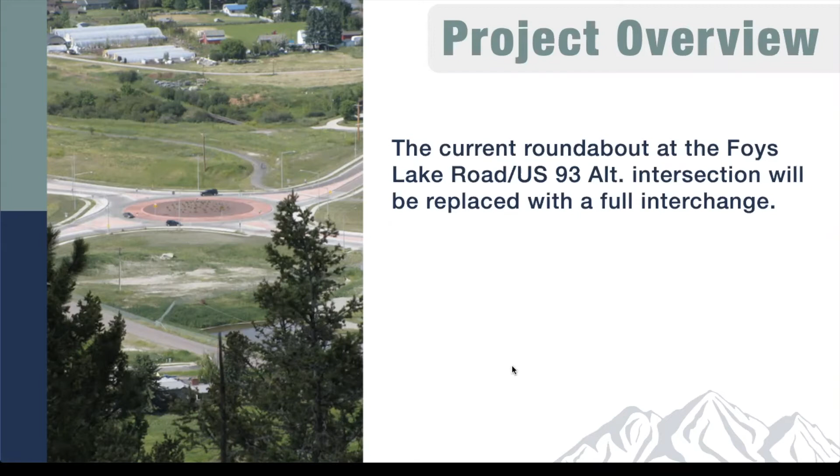Most of the signalized intersections you're probably familiar with that have 5 legs are pretty universally known as malfunction junction, regardless of the city they're in. Missoula has one, Helena has a couple. A 5-legged intersection really struggles to get the timing and signalization to work right without causing severe traffic congestion. So with that, I'm going to turn this presentation back to Beth so she can go into a little greater detail on the design review.

First off, when navigating roundabouts, drivers slow to between 15 and 20 miles an hour, and they're all required to travel in that same counterclockwise direction. This type of movement really reduces the likelihood and severity of an accident. Roundabouts are highly effective in reducing crashes at intersections, and that supports MDT's primary goal of providing safer roadways for this project area and across our whole state.

It's also important to remember that for the Foys Lake Road project specifically, roundabout intersections are really only a part of the interchange features and operations. We project that 20 years from now, in 2041, only about 50% of the current intersection traffic will be using the single lane roundabouts constructed on Foys Lake Road. So these roundabouts are seeing a lot less volume, and a well-functioning roundabout allows traffic to keep moving, which results in less delays and increased efficiencies compared to traditional signalized intersections at ramp terminals like this.

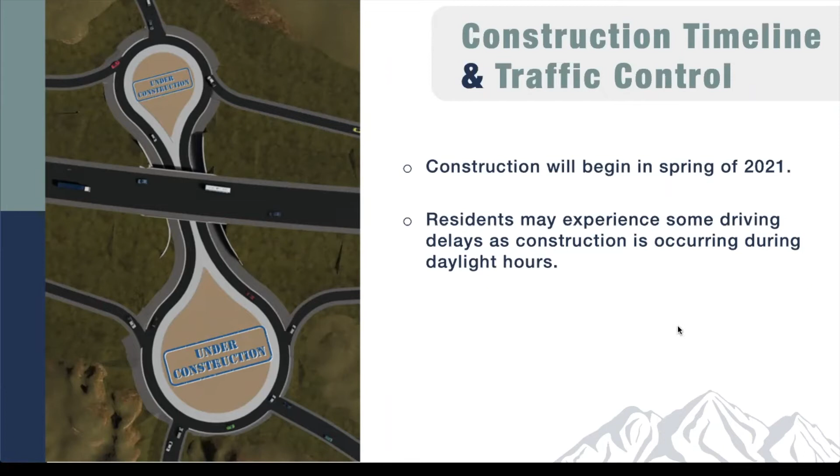One of the big things people are always concerned about is impacts — how's it going to impact me? Well, as with any construction project, we're going to have some delays and interruptions in traffic. We'll try to minimize those, but if everyone using this intersection as a commute plans on 15 extra minutes, you won't have any problems.

We're going to be real proactive in dust control. There will be a little more noise in the area from construction, but all our work will primarily be done during daylight hours. Any night activity will be scheduled well in advance, and notifications will be made.

Traffic will consist of single lane closures during work hours, mainly on Foys Lake Road. Our traffic control folks will use flagging operations and temporary signals if necessary to facilitate traffic. We may see occasional weekend closures — those will be scheduled, and notifications will come out well in advance. Those are mainly for operations that really require closure for safety reasons.

One thing we're thinking about now is setting the bridge beams, where we'll have two cranes out there with 120-foot long beams. We don't want traffic going under them, so we will have to do a closure. But we'll do that at low volume times — weekends, nights — so the road will always be open during peak traffic hours and during the weekdays.

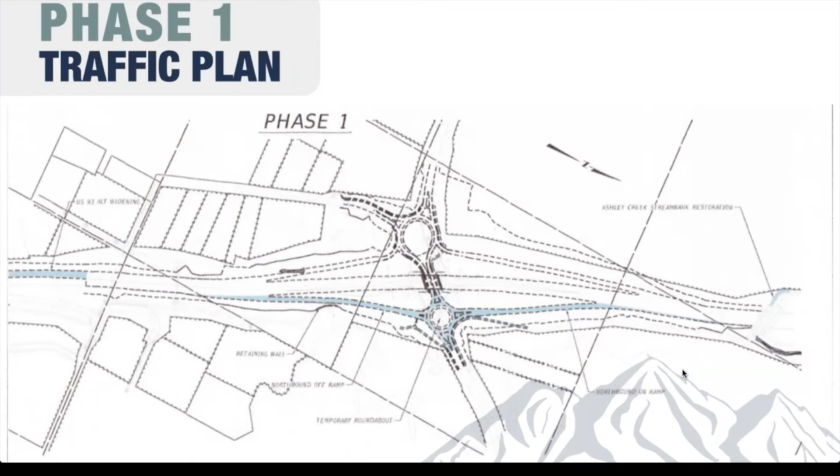Once that's completed, we'll shift traffic back. We'll finish construction of the west roundabouts and Foys Lake Road and be done by November.

Just a quick reminder, there's no need to memorize this information. Becca and Big Sky Public Relations will be providing weekly updates via email chains, and it'll also be on our project webpage beginning in March. All of these details will be included at the end of the presentation.

In addition, and this is something we did on the north portion of the bypass that was really effective, we're going to be holding weekly public meetings on Thursdays, beginning March 4th. We really want to invite everyone to attend — these meetings will run 10 a.m. to 10:30 a.m., and we'll do those also via Zoom. Members of the project team, including myself, will be present to answer any questions as construction progresses, and Becca will put up more information on that at the end of this presentation.

So with that, I'm going to turn it back over to Bob to talk about budget and maintenance.

Thanks, Jim. This project was awarded to the design build team of LHC and KLJ Design for $14.7 million. Fortunately, MDT was able to partner with the city of Kalispell, which did the legwork to obtain a build grant and secured funds of $12.7 million through this process. The remainder, $2 million, is being funded through a combination of Montana Department of Transportation's federal and state highway funding sources.

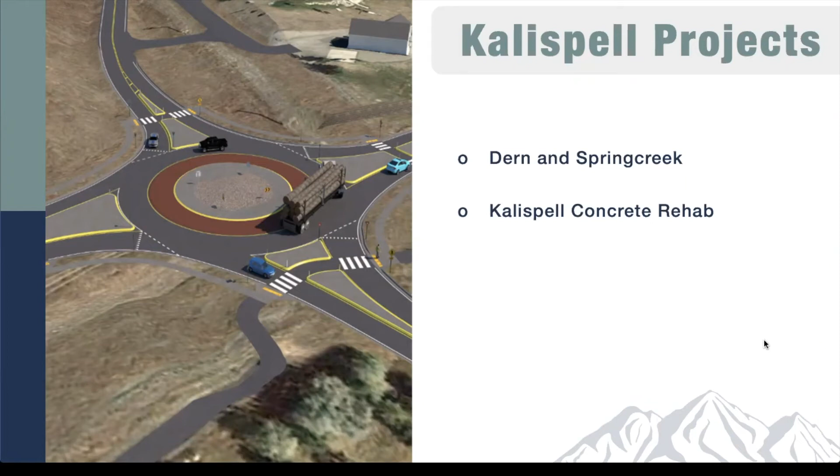The last thing I want to touch on briefly before I turn this back to Beth is Vision Zero. Vision Zero is a multi-pronged initiative with the ultimate goal of eliminating deaths and injuries on Montana's highways. Without good roads, bridges, and intersections, traveling safely and efficiently through Montana would be very difficult. More deaths and injuries would likely occur, and it would be harder to do business, visit family, or organize public events such as track meets and concerts. Having good roads, bridges, and other transportation systems, and educating drivers how to use them, is critical to building strong communities in a strong state.

As one of the Flathead Valley's most traveled roadways, the Kalispell bypass project must align with our Vision Zero goal, and we strongly believe the design presented to you today will allow us to best achieve our goal.